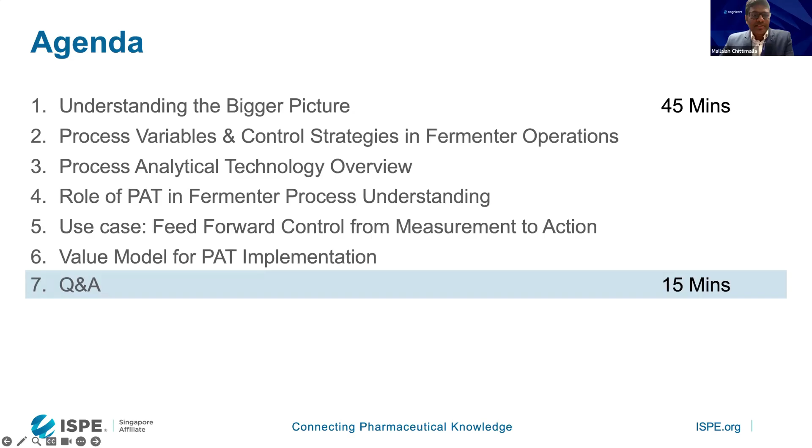And from there we will move on to the process analytical technology overview. We will take Raman PAT as an example, and we'll look at various components of the PAT architecture and understand its role in deeper and richer process understanding. We will also look at one real-life use case, from your measurement all the way up to your advanced or feed forward controller action. From there, we will also explore a value model for PAT implementation at any factory. And finally, we will wrap up with a Q&A. So feel free to note your questions for the slot that we are dedicating for this purpose.

So let me take a moment to align on what you can expect to take away from this session. By the end of the session, you will be able to understand or articulate the business impact of your fermentation efficiency. This is not just optimizing a process in isolation. It is essentially driving those broader business outcomes. And then understand how these CPPs and CQAs interact, and what kind of control strategies are evolving, from traditional PID loops to more intelligent and feed forward mechanisms.

And then you will come to know the different components in an end-to-end PAT architecture. We will present you one example PAT architecture and how the components interact with each other. And finally you will also understand how to move from concept and theory to a business case, with an illustration of how to calculate your returns when you implement a PAT kind of solution, and how to present it to your decision makers.

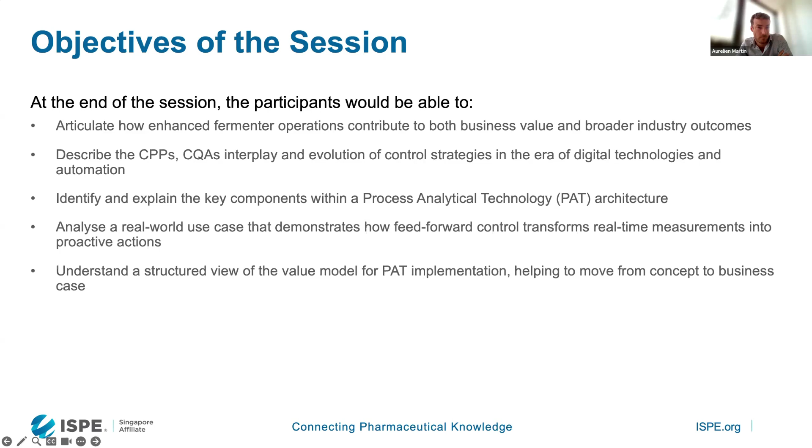So the goal is to walk away not just with technical insights, but with a strategic framework you can bring back to your teams and operations. So this is the objective of the session. I'm just moving on. So quickly, I'll be covering the industry challenges.

You all know the expectations from the patients, the regulators, and society in general are changing rapidly when it comes to medicine and drugs. So the industry must evolve with that. Speed to market: when I say speed to market, patients want the treatments faster. So the industry has a responsibility to bring those medicines to market quickly.

The demand is ever growing, so we need to meet the demand by optimizing our efficiencies, producing better yields, and so on. Cost pressures are always there, so we need to make medicine affordable. That means we need to cut costs and produce efficiently. Sustainability by design refers to consuming less water and energy and reducing waste. There are a lot of net zero initiatives that we see in the market today.

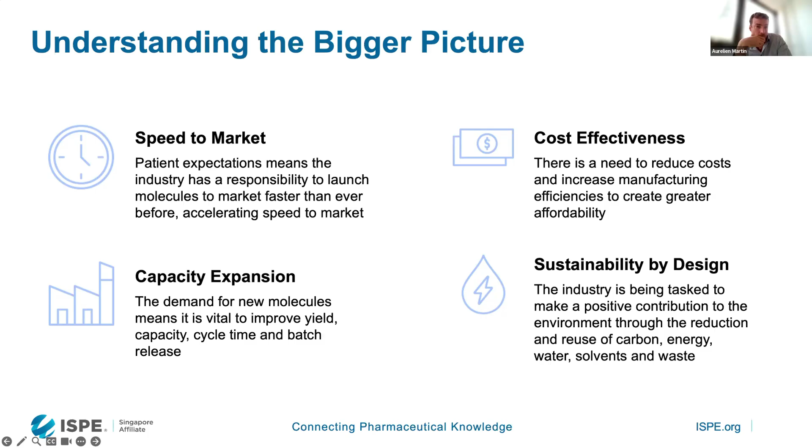Most of the modern factories coming today are state of the art factories, no doubt at all. But what we need is a smart factory, with smart tools which support us in all these business drivers, so that we can transform and run our operations faster, better, and leaner. That is what these tools are going to enable.

Those industry-wide challenges we just discussed are not in isolation. They are not theoretical. They are actually shaping how the industry sets up and chases its KPIs. So let's understand from a simple fermentation process perspective how that can impact your financial outcomes at an enterprise level. At an operational level, the heart of manufacturing, we usually have KPIs for yield, cycle time, waste, productivity, and so on.

Every batch from our fermentation that hits the targets on these KPIs accelerates the time to market of our commercially available product, which improves the working capital turnover and adds quicker revenues. Minimizing deviations keeps our operations costs leaner, which improves our OM at a BU level, or EBITDA at enterprise level. EBITDA is usually calculated by subtracting your expenses from the sales revenues in the profit and loss statement.

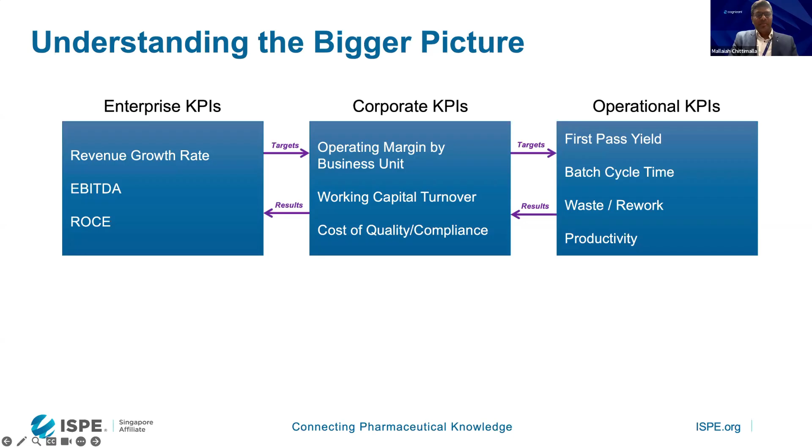So improving these operational KPIs is very essential. What we need is connected, smarter technologies for understanding our process better and controlling our process better. This is how we drive the impact. So next time you are analyzing any batch failures or trying to optimize your glucose injection strategies, just remember that you are not just optimizing that steel vessel in isolation. You are driving business impact.

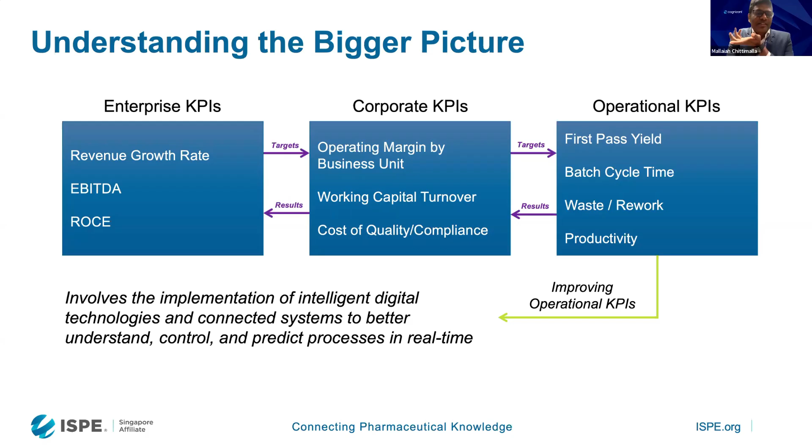So with that background on business, let's come back to our topic, the fermentation process. Let's understand some of the key CPPs that govern our fermentation process. These parameters play a very crucial role in maintaining process consistency. First, temperature. Any fermentation process is highly sensitive to temperature; it affects the reaction and growth kinetics. Usually robust jacket control mechanisms are employed to avoid thermal shocks.

pH: maintaining the right pH is very essential for cell growth and cell metabolism. We control it with acid or base dosing pumps, with inline pH probes and feed forward control loops to maintain the flow rates. Dissolved oxygen is another important parameter for aerobic fermentation processes. The cells use it for respiration and productivity. Usually we control this by agitation speed, sparger airflow, or sometimes direct oxygen supplementation. DO is tightly linked to your oxygen uptake rate and metabolic shifts.

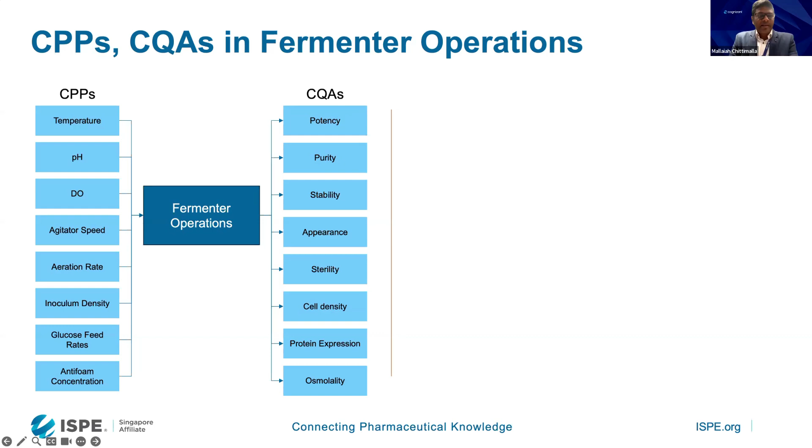we all know. Let's focus on the glucose here, because our discussion going forward will be totally focused on the glucose feed rate. So glucose, I would say, is not just a nutrient, it's a control lever that we have, basically. So managing the glucose feed rate precisely is essential to maintain a healthy, productive fermentation environment. A deviation here not just causes a metabolic shift, but it can cascade into your product quality attributes.

So let's look at overfeeding. When we inject more glucose than required, it can lead to overflow metabolism. Instead of converting the glucose to CO2 via the TCA cycle, the cells will find a shortcut to generate energy. The shortcut could be converting this excess carbon to byproducts like lactate or acetate. So that situation we need to avoid.

And when the cells feel nutrient starvation, their behavior changes, the growth will arrest. It enters a stationary phase. And if there is prolonged starvation, it can lead to cell death also. So this is why glucose has to be tightly controlled, and we need to move away from reactive to predictive control mechanisms.

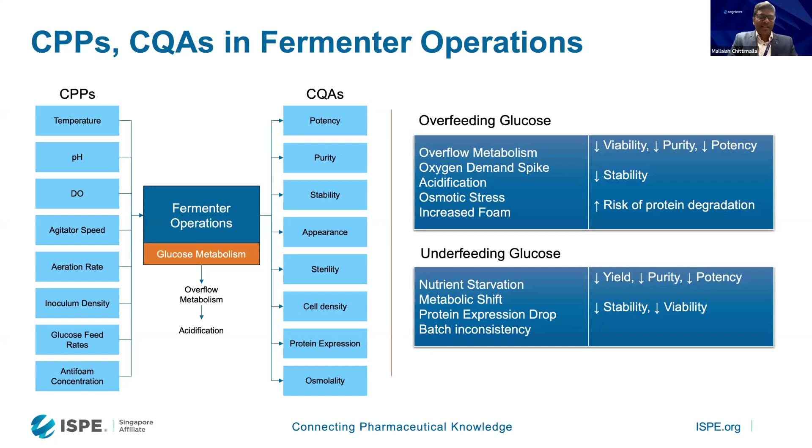So with that background, let's quickly look at some of the control strategies that we have today. Just imagine yourself standing in a GMP clean room in front of this kind of fermenter with limited instrumentation. You don't have any real-time data. You don't know what is happening behind these steel walls. There could be metabolic shifts happening. There could be lactate or byproducts accumulating. That is the reason your batch yields swing like a pendulum between different batches.

So traditionally, with such systems, operators manually withdraw samples from the fermentation broth, transfer them to the lab, the lab analyzes them using their own techniques and communicates the results. Only then did operators take actions. So any change required in your glucose input is reactive, based on past data, not real-time insights. So the limitations: there is a time lag, contamination risk, it's labor intensive, and there is no real-time feedback. Quality is known only after testing in the lab.

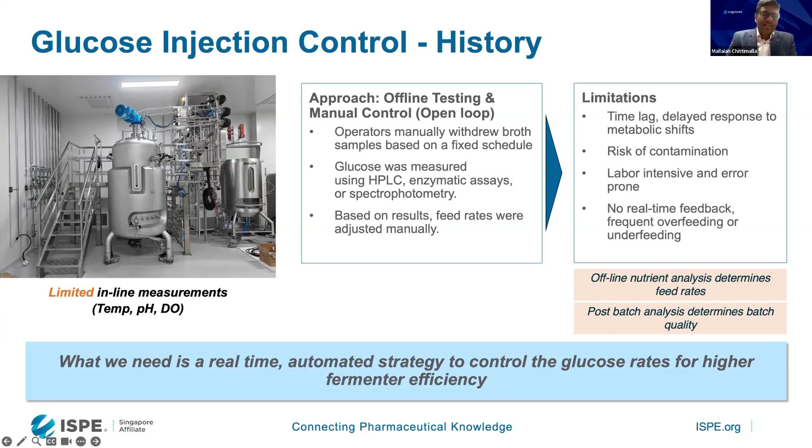So what we need is an automated strategy powered by real-time data. That is what these kinds of tools are going to enable. The modern approach essentially uses PAT and quality by design principles. So imagine the same bioreactor in a GMP clean room. Now that bioreactor has all the instrumentation, and it talks back. We are not waiting for problems; we are going to prevent them. The process is not controlling us; we are going to control the process, with inline sensors like Raman PAT, right inside the vessel.

Making measurements within the fermentation broth, and these measurements in real time, when cascaded to your chemometric models, will give you the component attributes of your vessel, right? Those models will interpret that complex spectral data to estimate the concentrations. You don't have to draw any sample from this vessel. So that is your inline monitoring.

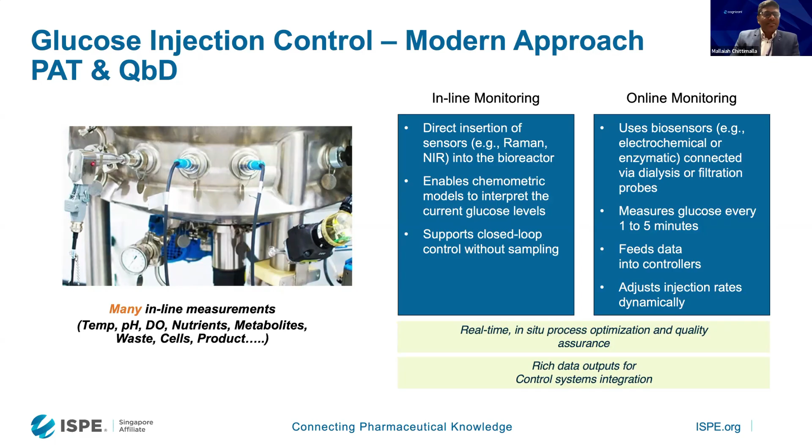There is no sample transfer required. There is no contamination risk. It enables your fully automated control, right? So this is the difference in the modern approaches.

So let's look at some of the basic control concepts, very basics. Manual: you have a controller, you give a set point to the controller, and that controller keeps maintaining that set point unless you manually change it. Feedback is a very classic control loop, widely used for many parameters. It measures a process variable of a process and compares it with a set point, and the difference, in control language, is called an error.

Your controller looks at that error and makes an adjustment in your control valve. The final control element is your control valve. The manipulated variable is the opening of that control valve, so it changes the opening, basically the input to your process. A feedback controller senses the change in the process value, which means the process has already been impacted and the value is either reducing or increasing. That difference is known, and then you take an action. So again, it's reactive.

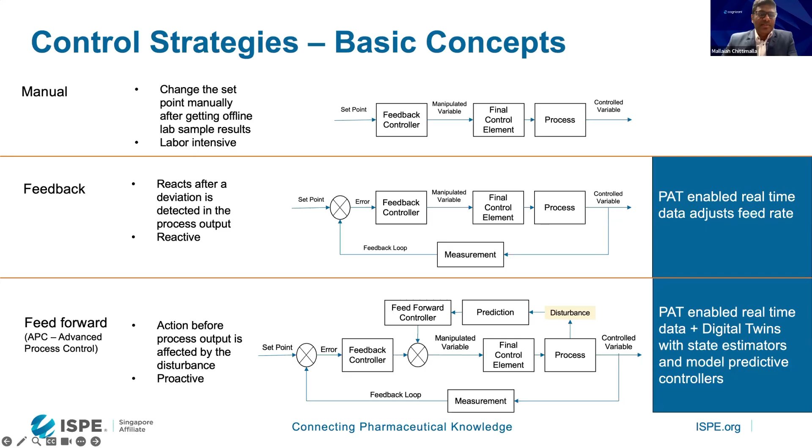Feed forward is something exciting, an advanced control strategy. It senses the disturbance in the process and overrides the signal coming from your feedback controller. It takes an upfront action so that this disturbance will not reduce your process value. Even when the process value is maintained at the required set point, it could take an action because the disturbance is going to reduce it in the near future. So these are some of the basic control strategy concepts.

So now we have seen the basics on fermentation, parameters, and basic control strategies. Let's look at what this PAT is and its components. We have the Raman probe, which is nothing but a sampling interface. It delivers the laser light to the sample and collects the scattered light from the sample, and is generally inserted directly into the fermenter as an inline probe.

There is a fiber optic cable which connects the probe and the analyzer. The analyzer houses the laser source, the spectrometer, and an embedded controller and its software. The laser source sends laser light with the required wavelength depending on the sample type, and the spectrometer separates the collected scattered light into component wavelengths, generating a spectrum that shows the intensity of Raman shifts, which correspond to molecular vibrations in the vessel.

The software can pre-process the raw spectral data collected, convert it to Raman spectra, and send it. It can interface with your process control systems or the PAT orchestration tools.

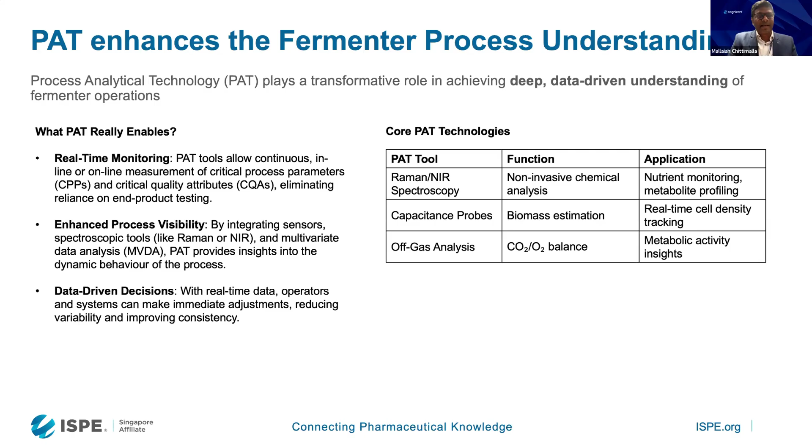So it enables visibility into the process. It enables you to take data-driven decisions. Basically we are shifting from schedule-based actions to condition-based actions. So that is how PAT enhances our fermenter process understanding.

So now let's see how we move from the real-time component information we are getting from PAT tools and chemometric models, and how we use this information to generate an advanced feed forward control signal. What we need is essentially a digital twin of the fermenter, with mechanistic models and state estimation models.

When I say mechanistic models, they are engineering models, essentially the engineering twins of your fermentation vessel. Unlike pure mathematical models, they use engineering principles and science: mass and energy balance laws, heat transfer laws, reaction kinetics, thermodynamics. So basically you model your physical fermenter.

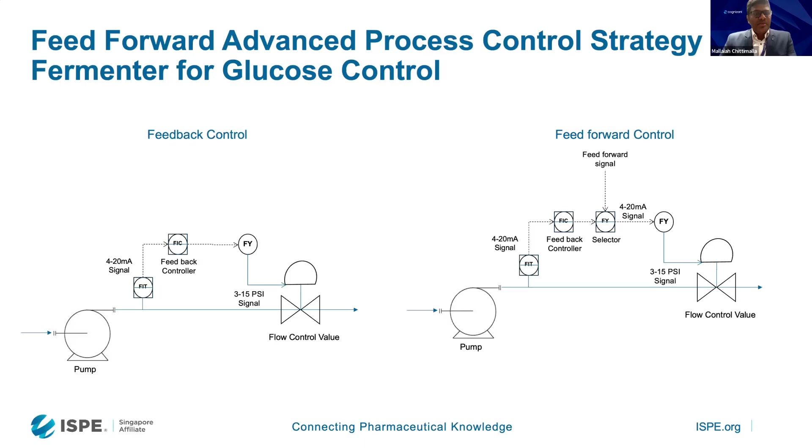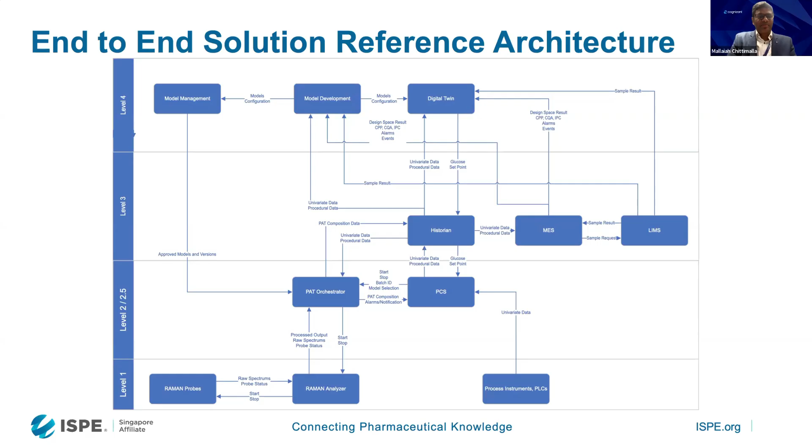So I'm just moving on. Okay, we have already discussed this. Usually, these analyzer softwares will interface with your DCS systems or any other PAT orchestration tools generally via OPC. If it is a little older system, you can also integrate via Modbus. But that is how they integrate and exchange the data in two ways, right?

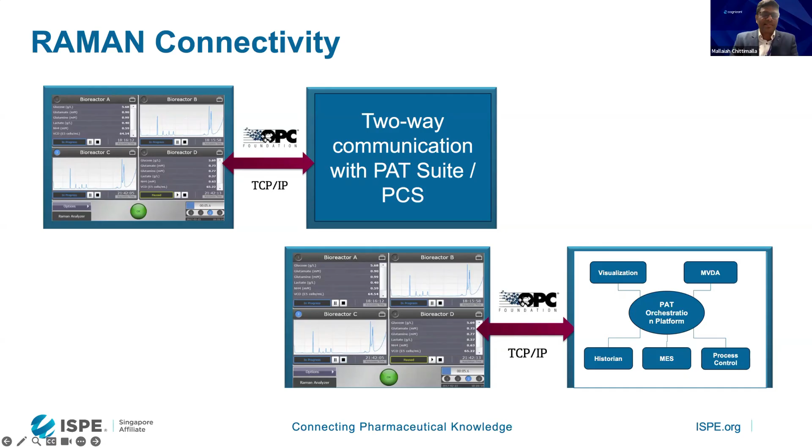Coming to the summary of the components, right? It's starting with the probe. Probe is considered as the eye because it sees the sample, and then the analyzer is considered as the brain because it processes what the probe sees, right? The orchestration platform is a very important component in the end-to-end architecture because it coordinates a lot of stuff and runs the chemometric models, right?

So when you have multiple production lines, multiple fermentation vessels, multiple samples, this is the one that coordinates all that and selects proper models for proper samples and so on, right? Then the chemometric model, we discussed it. It processes not the raw spectral data, but the processed spectral data, the spectrums, Raman spectrums, and converts it to your component concentrations, right?

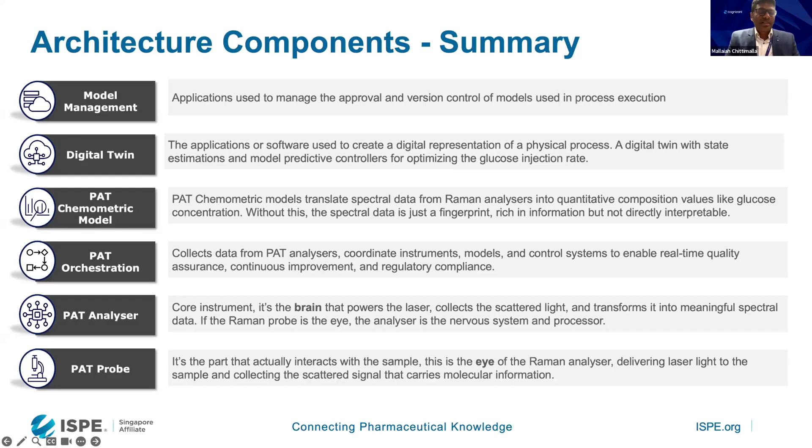Digital twin, we discussed. These are the engineering models. Model management again is essential because this end to end is going to be a GMP validated environment. So version control is very important here. Then, yeah, we looked at different models that are available. I'm just moving on.

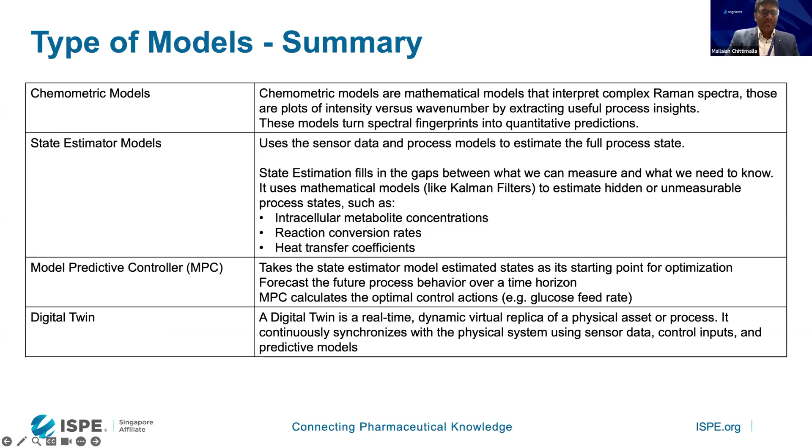So I will quickly touch on how to build a business case for PAT implementations, right? And how to move away from a concept to a business case, a value model, and how you should present it to your decision makers for budget approval, right? So this is the value model we typically use.

On the left hand side, you see we have a use case here, and the business drivers map to this particular use case. You have speed, revenue, cost, and some cultural aspects, and you have the value levers, right? Asset productivity, supply productivity, your process productivity. So PAT tools essentially optimize these value levers to drive the business impact on these parameters. So the left hand side talks about the business, right?

And if you look at the central part, you have the KPIs and metrics that you can set some targets against, right? So you have your KPIs like yield, cycle times, your operating costs, and how fast you can move from a process fit to NPI, right? Things like how deep and rich an understanding of the process you are going to have, your release time and all that, against which you can have some targets.

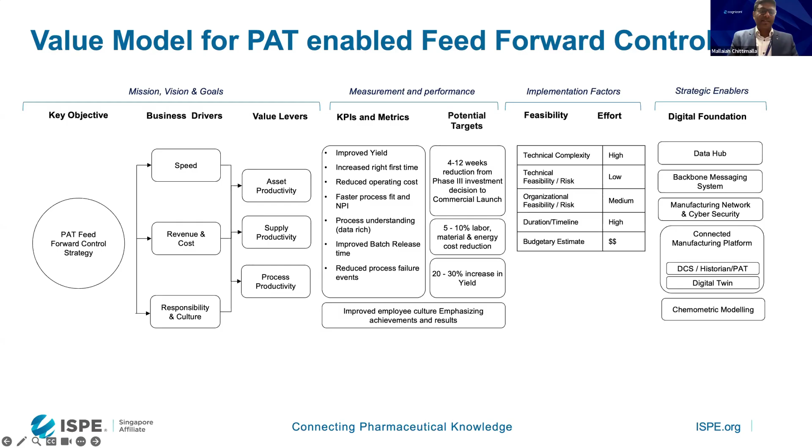So moving on, this slide presents an illustration of a cost benefit summary. Various cost elements; again, this could be for one site. You will have various cost components, and this is another classic example where you have all OT hardware, IT hardware, your software, and then you will have all services. The services could be integration services, it could be model development services. So all put together, it can go up to 700K to almost 1 million dollar budget. So it's expensive, but let's look at the benefits.

So you need to collect certain baseline, base year information. Just assume that you are producing 55 batches in a base year, with an average yield rate of 25 grams per batch. In the base year there is too much deviation here. The minimum in a batch is 20 grams, and the maximum is 35 grams per batch. So the yields are swinging like a pendulum here. The total grams that you produced is 1375, and cost per batch from the base year is approximately 300K, including all your material costs, labor costs, and overhead costs. So this is how you can collect baseline information from your finance department or operations department.

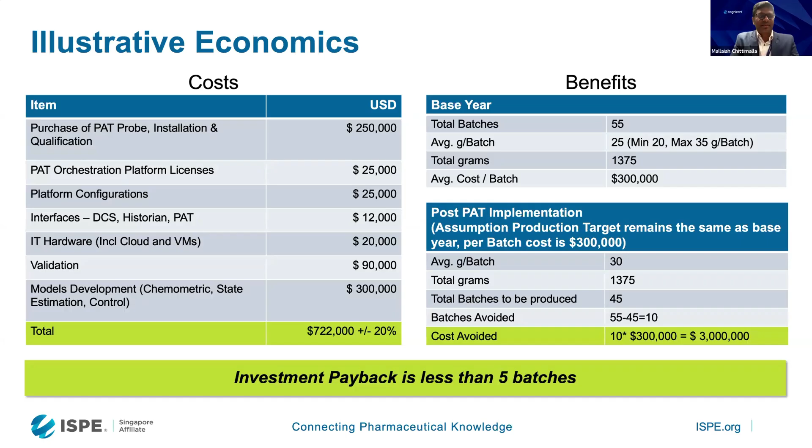So with that, I have completed my discussion. If we have any questions, we can discuss. Obviously, we couldn't cover it in depth because of the time availability, but you can pass the questions to ISPE or to us. We are always available to answer your questions. With the 45 minutes given, we couldn't go in depth, but I tried to cover the complete concept of optimizing batch yield using tools like PAT and advanced control strategies. Any questions? Anyone?

Thank you, Mallaiah. Aurelian, do you have any comments or questions that you received? There were questions from Osam. I'll try to reply verbally. As mentioned by Osam, mathematical models are inherently not accurate. There are many parameters and multiple dimensions. Those mathematical models need more than 3 dimensions to get to the results, so it's obviously complicated to reach an accurate level. That's why there is a huge effort in training the model to work within the design space. As was presented, the development effort for this model is almost half of the budget, 300K out of 700 plus. So scientists really need to put the data together with the right model and the right tuning to get to that level of accuracy.